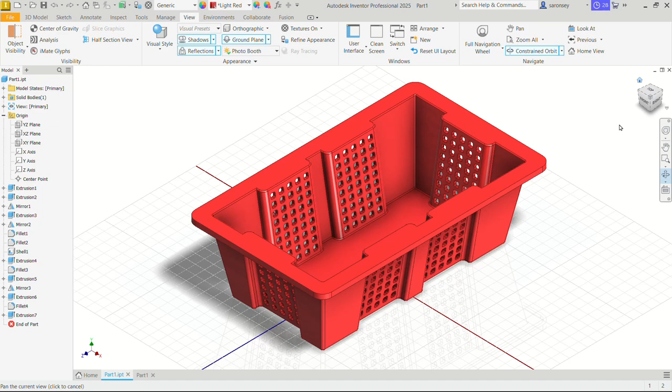In today's exercise, we would model this basket. This isn't as complicated as you see it to be. I would walk you through step by step how you can recreate this.

Let's get our worksheet new up here, or Control plus N. This is going to be a part, so on the part, create 2D and 3D object. Let's select the standard mm IPT template and create.

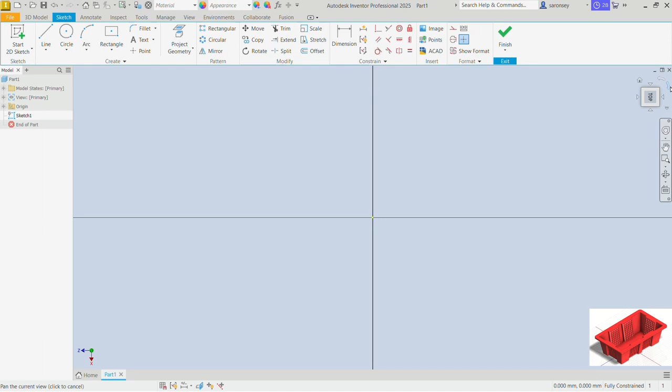Next, let's pick the 2D sketch command and create this sketch on the XZ plane. Now you can turn your sheet around with this arrow here so you can read the top from left to right. Now drop down the rectangle options and pick the 2-point center rectangle.

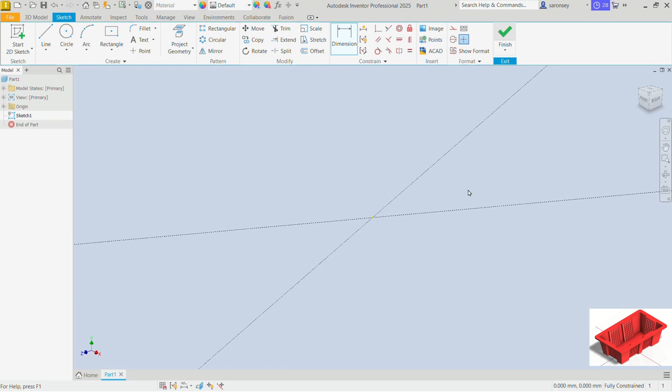We will draw a rectangle here at the origin and dimension this with a width of 200 and a height of 400. Let's enter that. Now we can finish this sketch. Double click the scroll mouse button so you see your work.

We would extrude this profile. The extrude command - the profile has been detected. For the direction, it's okay, we would use the default, but the distance of extrusion we want to change to 150.

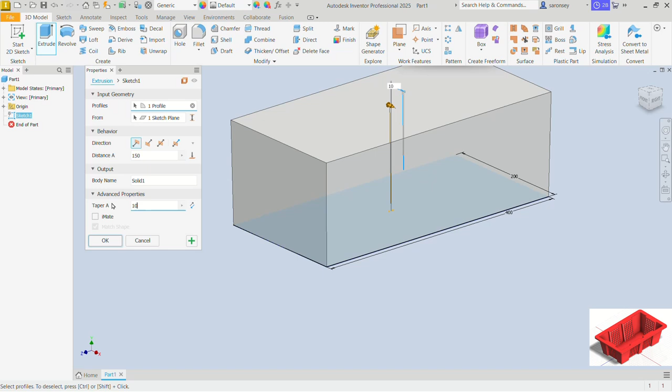We want to apply a little bit of taper here, so we taper this downwards. Come down here under the taper angle and change that to 10. And that is what we want - we have a little bit of taper.

Now we can OK. Next, we want to create the little cutout here on this face. For that, we would pick a plane to work on. Let's open the default planes and work on the YZ plane. I'll click on that and pick this icon here that says create sketch.

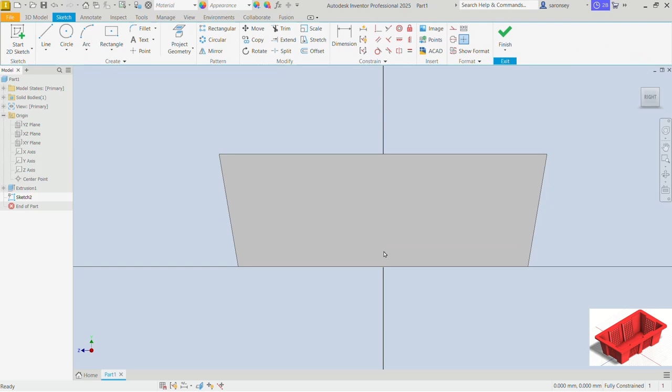Now I don't see the plane because it's hiding in the middle of our feature. Let's slice so we see that face we want to create the sketch on, which is this one. Next, we would pick the rectangle command, the 2-point rectangle. Let's draw our first rectangle here.

Make sure you lock onto this top line. You click and drag and then lock it onto this base line also and click again. We'll do the same on this side. And then we will dimension.

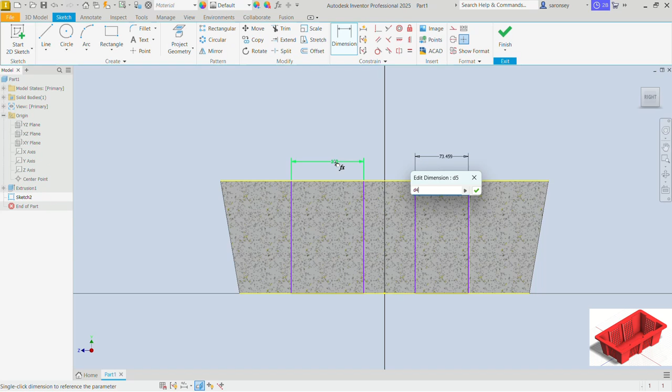The distance between these two lines is going to be 100, and also between this and that is 100. Just click the 100 you have here so you can have that replicated here and check. We would also dimension the distance between this line and the origin as 20, and do the same between this line and the origin as 20.

Now we can finish the sketch and we want to extrude, but the extrusion we want to extrude from this face, not from this plane we selected here. This is how we would go about it.

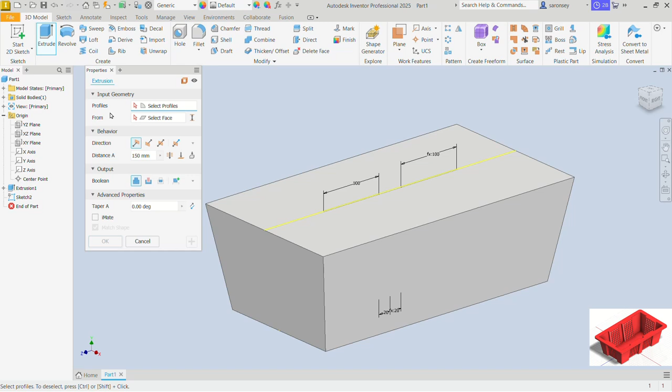Let's pick the extrude command, and here you want to come down to this one here that says 'from'. But first of all, let's select the profile we want to extrude - this profile and this one. Let's change the boolean to a cut.

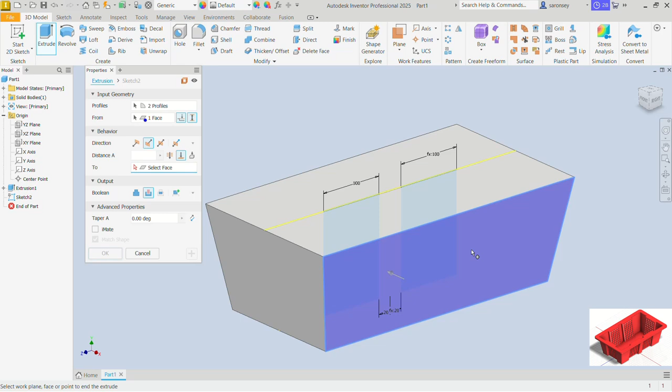For the cut also, from the plane, we want to change this - we don't want to extrude from the plane we created the sketch on. So just turn on the 'select between' option. And now we have to select the face we want to extrude from, which is going to be this face here. We would specify the distance of that extrusion as 15. There we have the preview, it looks fine, we would OK.

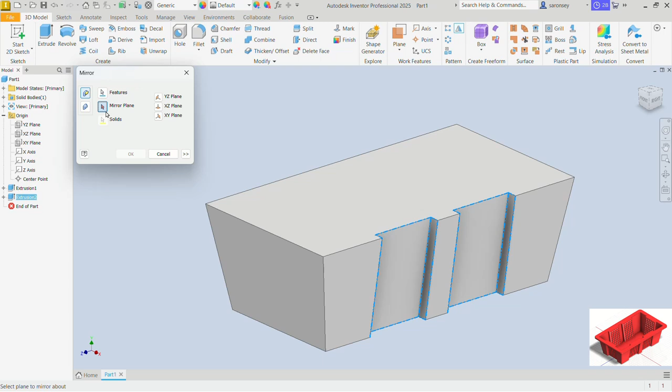For this extrusion we've done here, we want to mirror on the opposite side. We'd use the mirror command up here. The features we want to mirror, we would select these features we just extruded. The plane we want it to go across, the mirror plane, select that and we'll choose the YZ plane and OK. Now we have the same on the opposite side.

We also need to do the same on this face and the opposite face as well. First of all, let's pick a plane to work on, which is going to be the XY plane. I'll click on that and choose create a sketch here. Now let me slice so I see that face.

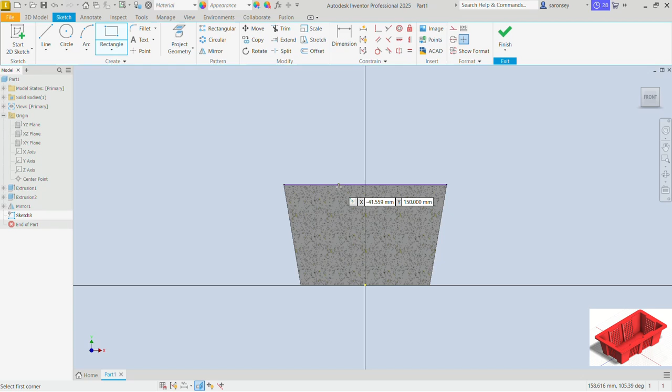We will pick the rectangle command. Let's draw a rectangle here. We will dimension the distance between the two lines here that form the rectangle as 100, just like the ones we did before. And also put the vertical constraint between the midpoint of this rectangle and the origin - so just locate the midpoint of the width of the rectangle and align it with the origin.

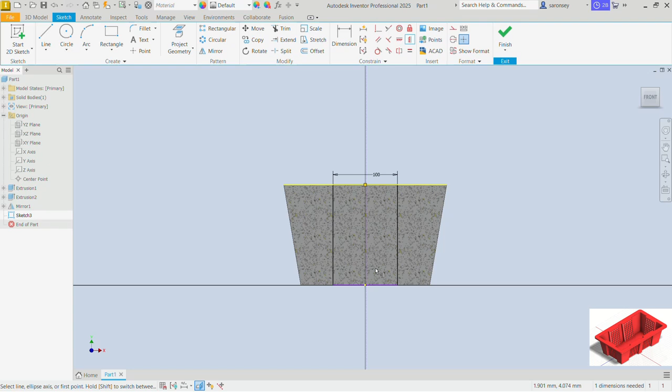You can finish this and we would extrude. Same procedure, we pick the extrude command. The feature is going to be this one, which has been automatically selected. For the from, we would pick this option, turn that on, and we will select to extrude from this face.

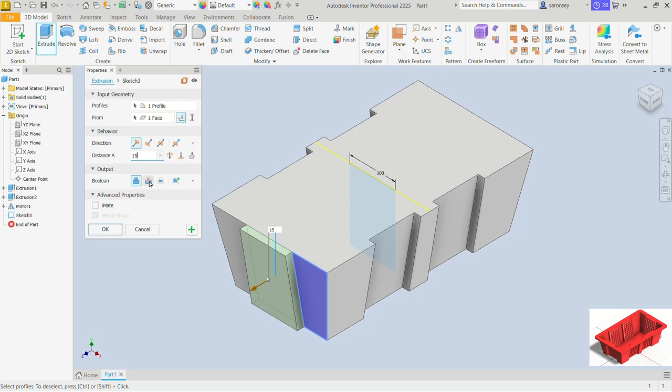Now we'll specify the distance of 15. The boolean is going to be a cut. The preview looks fine, let's OK. We would also mirror this on the opposite side.

The mirror command, the feature is here - I have selected that. And the mirror plane is going to be the XY plane. We see the preview, and so we can OK. Let's inspect what we've done. All right.

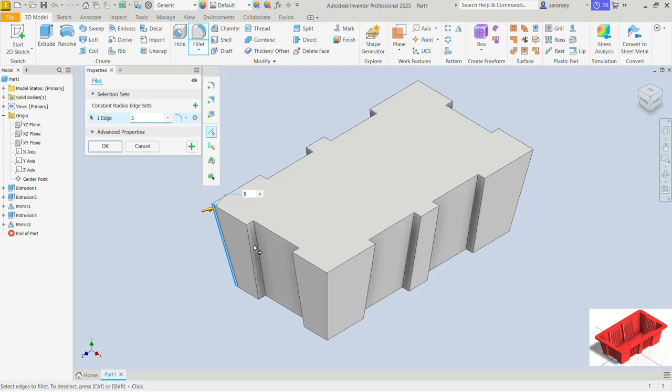Now let's apply some fillets. Let's pick the fillet command. The fillet radius will change from 2mm to 5 and apply it to all the edges here. So just watch and do the same. I'll speed this up a little bit, but it's basically all of the lines. In all, you should have 26 edges selected.

Okay, now you can hit the plus sign. Let me turn this around so we can also apply a same fillet to this base. For that, you can just touch on the outline and the whole fillet will be applied to all of the lines. Let's hit OK.

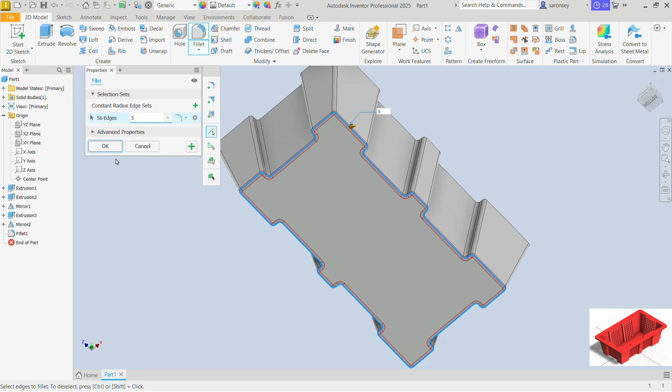Let me turn this around. Let me even get the isometric view. We want to shell this. Let's pick the shell command. The faces we want to remove is this face, and we want to leave a thickness of 5mm, so you can type that in here. Make sure this first option, inside, is selected and automatic face chain is checked. The preview is fine. Let's go ahead and OK.

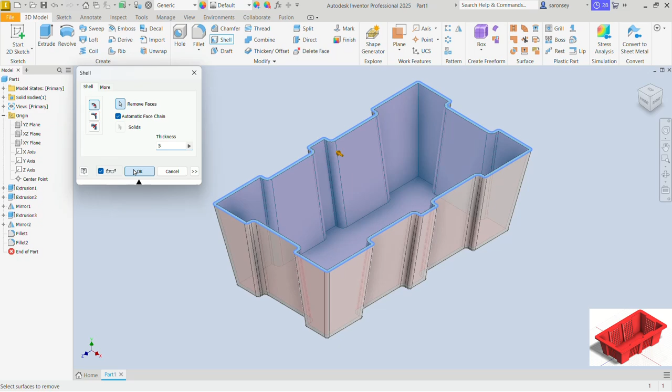Next, we will select this face and create a sketch on it. Before we create our sketch, let's project some geometries, so pick the project geometry command up here.

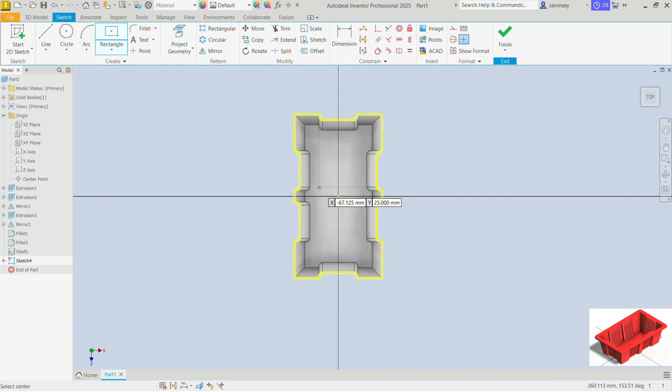We want to project this face, and then we would pick the rectangle command. Let's pick the 2-point center rectangle and draw a rectangle from the origin. We would dimension this and give it a width of 300, and we'll give it a height of 500.

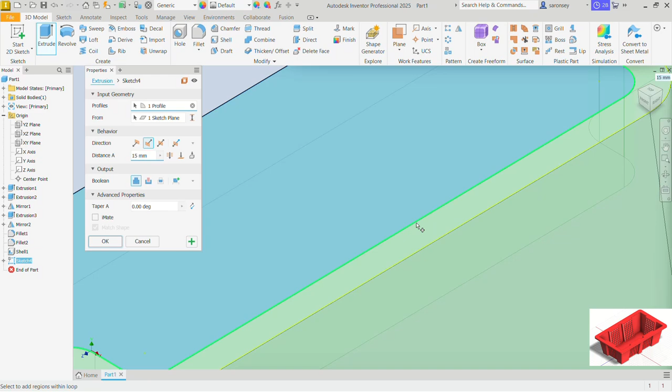Now let's finish this and extrude. The extrude command. The profile we want to extrude is going to be this profile. Also make sure you select this one as well. We want that extrusion to go down, so we pick the second option, flipped, and we want to change the distance of this extrusion to 5mm.

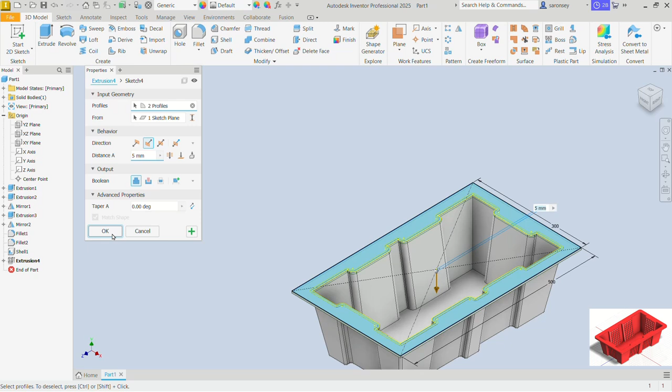Now you can OK. The boolean was a cut, sorry, so just double click on that extrusion, and we want to change the boolean to a join rather. Now we can OK. All right.

We need to apply some more fillets. Let's pick the fillet command again. The fillet radius is going to be 2 this time. Let's apply it to all of the edges here.

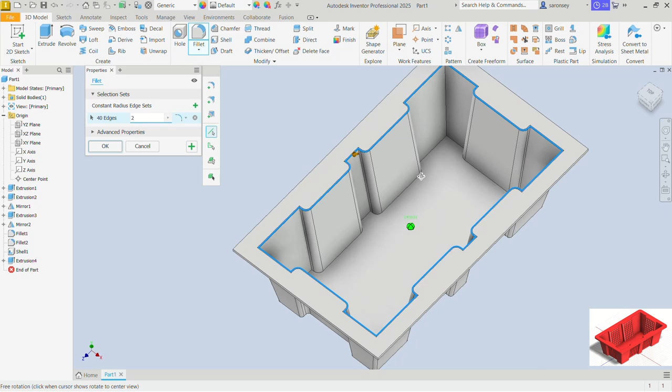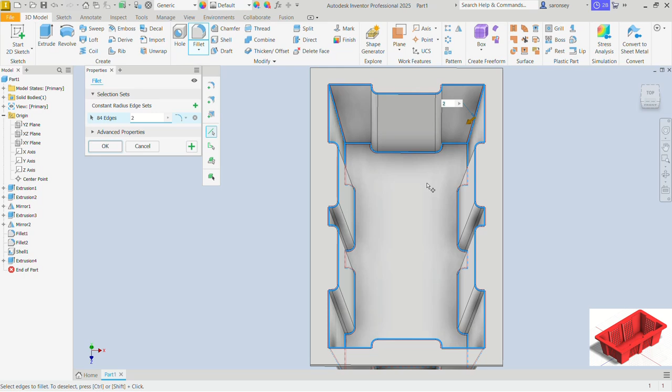Let me turn this a little, also to the inner edges. Just inspect and make sure you've selected all of the edges. Okay, that is fine. Let's now do these edges as well. In all, about 84 edges. Let's hit OK. Let's get the isometric view.

Next, we want to create those little holes on these faces, and we will do that by using the rectangular pattern and the mirror command. Let's see how that is done.

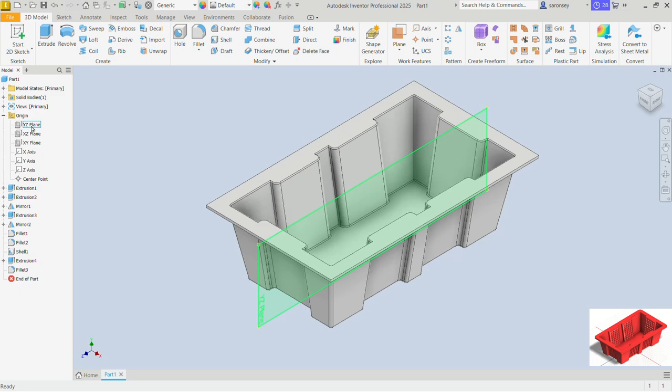First of all, we have to create the sketch we would be extruding. Let's pick a plane to work on. We can work on the YZ plane, so I'll select that and pick create a sketch. Now let's slice so we see the plane.

Let's enter that we want to apply a fillet also of radius 2.5 to all four corners of this little rectangle we've drawn.

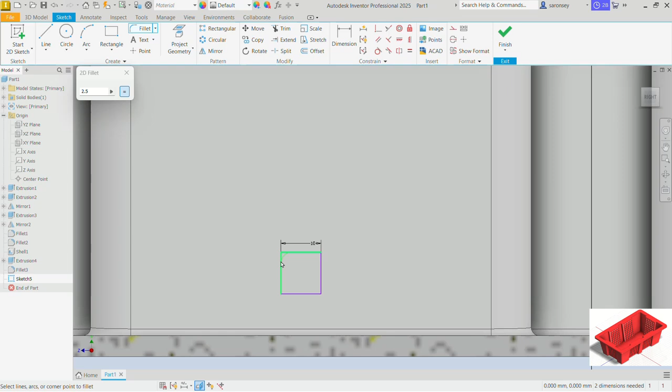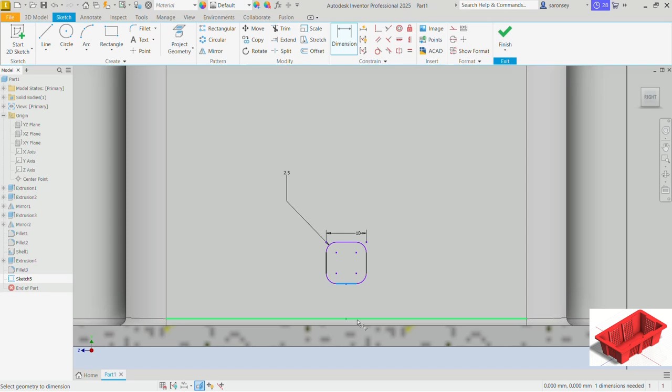Let's close this. We would use the horizontal constraint, that's going to give us the vertical one because of the orientation of the work. We want to align the midpoint of this line with the midpoint of this line also here.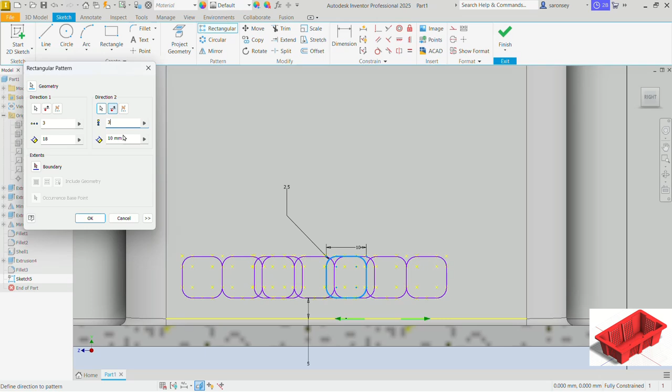We also want the same pattern on this side, so we'll hit direction 2 and also pick the same direction, but we see it's also moving towards the left, so we'll use this option here that says flipped. We want the occurrences to also be 3 and we want the distance between them to be 18. This is exactly what we want.

Let's hit OK. We want to rectangular pattern this again to the top, so we would use the rectangular pattern command a second time. This time the geometries are going to be all of these, so I'll click and drag over them.

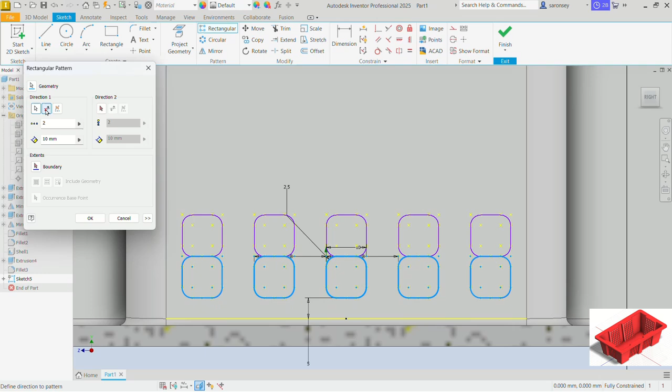For the direction, we want to choose any vertical line, so I'll choose this one and flip the direction of those rectangular patterns around. Now for that, I want 9 of them with spacing of 15 between them. Let me zoom in so we see the preview better.

Okay, this is exactly what I want. Now I can finish this and extrude these profiles. Let's pick the extrude command. It says we should select the profile, so I'll make this small and click and drag over all of the little profiles I have drawn.

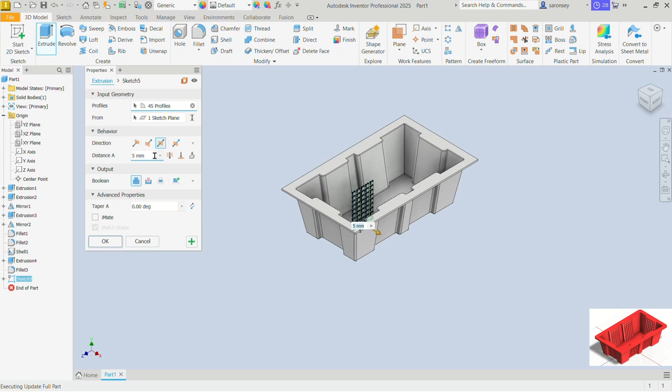Now for the direction, I want it to be symmetric and define the distance of this extrusion with the through all option. The boolean is also going to be a cut, not a join.

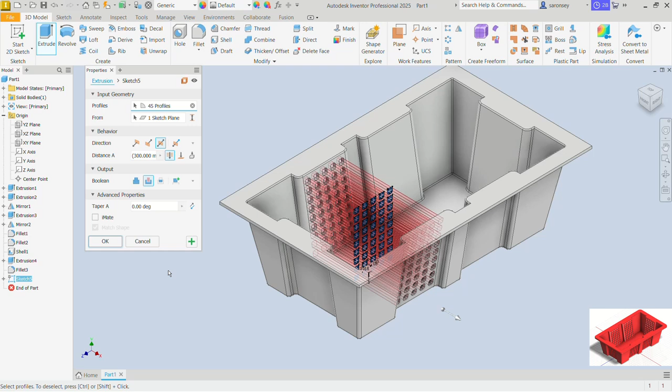This is quite a lot of work for Autodesk Inventor because we have a lot of profiles we are extrude cutting, so please give this some time depending on the quality of your machine. Now the preview is okay for me. Let me hit OK and wait a little. Okay, so that has been neatly done.

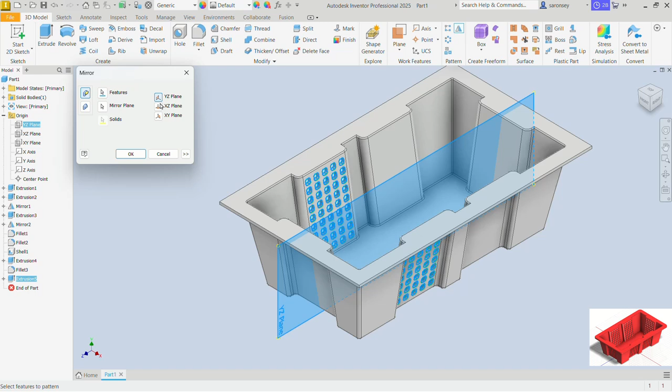I would also mirror these features on the opposite side so I can get the same on these faces as well. Let's use the mirror command. The features are going to be this extrusion, which I'll select from the model browser. The mirror plane, or the plane I want it to go across, let's see, I can use the YZ plane. There I have the preview. So we OK.

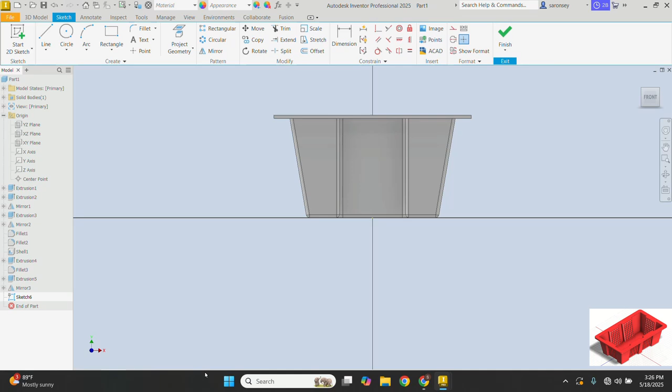Awesome. Now we'll do the same so we get those same extrusions on this face and that face. Let's first pick a plane to work on, which is going to be the XY plane. I'll click on that and create a sketch. I want to now slice so I see that exact face, same as we did.

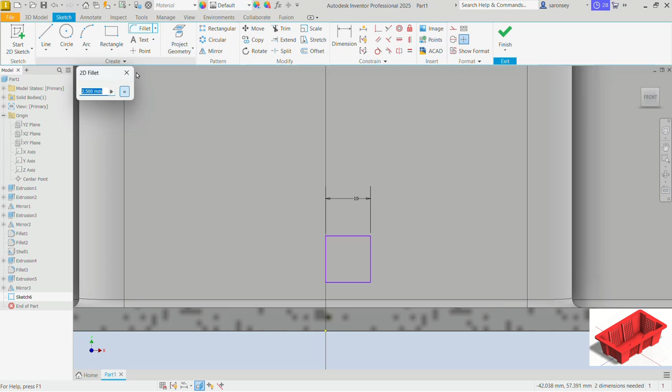Let's pick the center point rectangle command and draw a rectangle here, and dimension this as 10. Let's make equal this line and that line, and apply a fillet of 2.5 to the four corners.

Also put the vertical relationship between this point and the origin, and we would also dimension the distance between this line and this one as 5.

We would rectangular pattern just like we did, into the rectangular pattern command. The feature is going to be this one, or the geometry, sorry. The direction we can use this line. We want how many of them? 3. The distance between them should be 18.

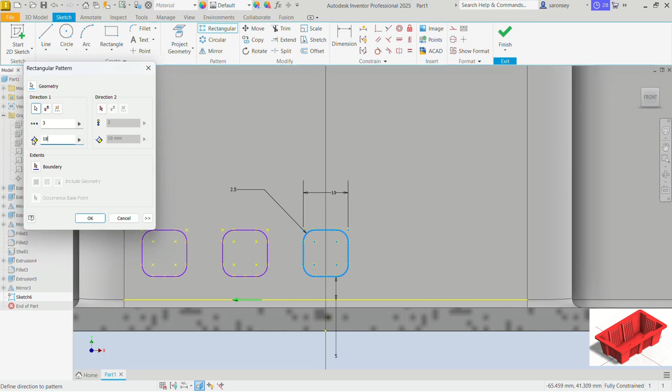We will go to direction 1 and pick any horizontal line, then flip that around. Let's change the occurrences to 3, and the distance between them also 18. Let's OK.

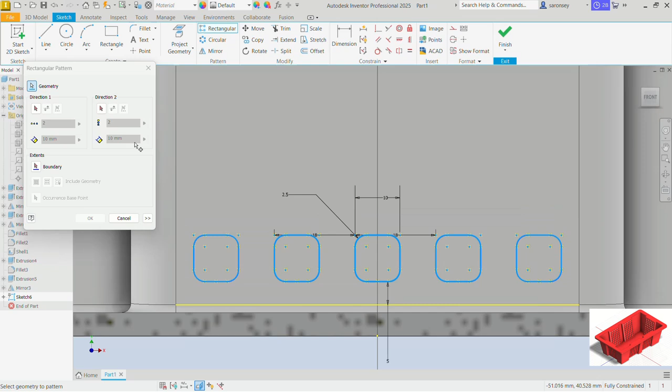We would also rectangular pattern again so we can get them moving in the vertical direction. For the geometries, let me click and drag over all of them. For the direction, we can use any vertical line, so I'll use this and flip the direction around. Let's change the occurrences to 9, and the distance between them also to 15. The preview looks fine. Let's OK.

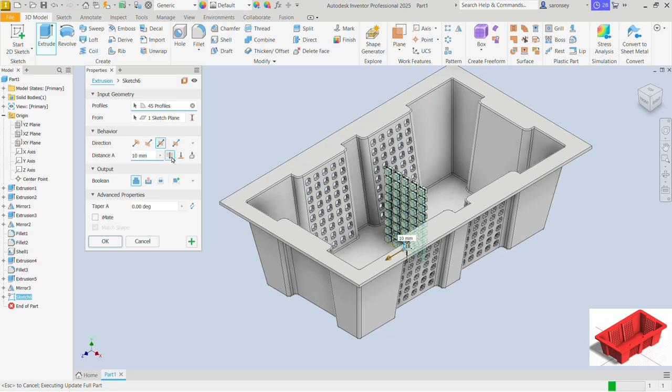We would also finish this and extrude cut them. The extrude command, for the profiles, let me click and drag over all of them. The direction is going to be symmetric, and for the distance let's use the through all option. For the boolean, we want to remove material, so a cut. And hit OK.

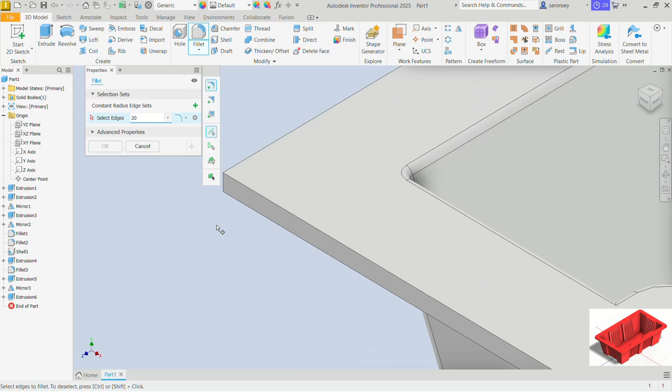Neatly done. Our model is almost done. Let's apply some more detail in the fillet. The fillet radius this time is 20. We want to apply it to this edge, also this one, let's look for this edge, and then finally this edge. Let's hit OK. Alright, now let's turn this around.

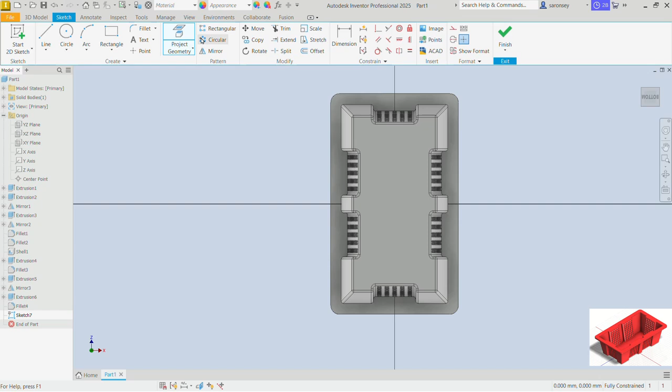We will select this face and create a sketch on it. We want to rather project this face, and also offset this profile to a distance of 5. Let's enter that. Now we can finish this, and extrude this very profile just so we can get a little bit of grip whilst raising this basket. The distance of this extrusion we want to change to 5, and hit OK.

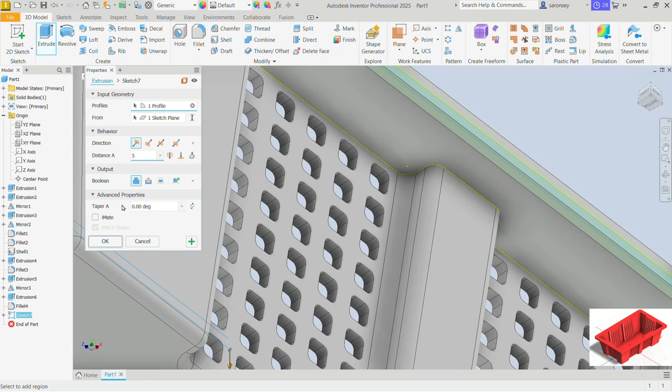Alright, so there we have it.

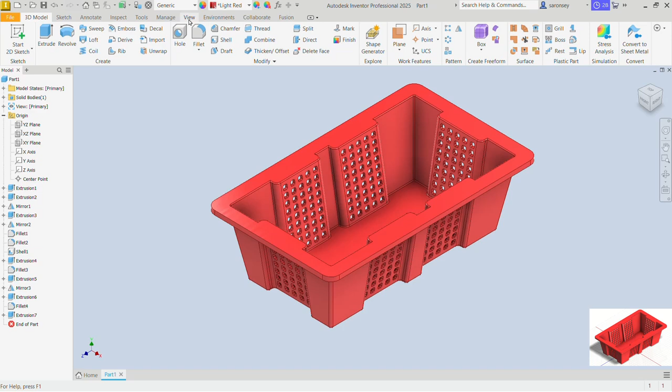Now let's change the appearance of this. I'll drop down the appearance options. You can choose any appearance of your choice, but I will do the light red. We'll do a basic rendering also, so go into the view tab, apply some shadows, apply a reflection. You can apply a ground plane if you want. And we will change the lighting effect to photo booth.